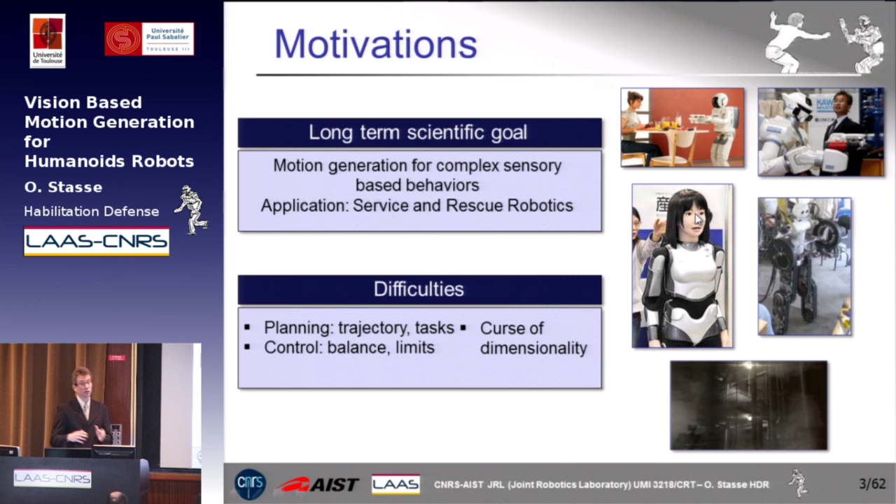And when we want to plan or generate motion, the main problem is to face the high dimensionality needed for this kind of robot. For instance, HRP2 or Asimo has 30 degrees of freedom to move and 30 degrees of freedom to manipulate, for instance in the new setup of Asimo regarding the hands.

So now, the question is what is the behavior? I'll give a brief introduction based on game theory, where we have two agents who actually play a game. We assume we have a game score that we will call F, that the agent we are interested in here is a robot, the HRP2 humanoid robot, and that this robot has a representation of the game, the environment of the game, and the other agent that we will call V, and that this agent can act in the environment, and the action will be here, for example, the position of the motors. Now, this game follows rules, which we will see precisely later on, and gives rise to inequalities.

And at the end, what we got is an optimization problem where we want to find a set of actions which will minimize or maximize the game score, considering the representation of the environment, and the free variable of this problem is the action. So based on that, the problem is how can we build the cost function for the behavior of interest?

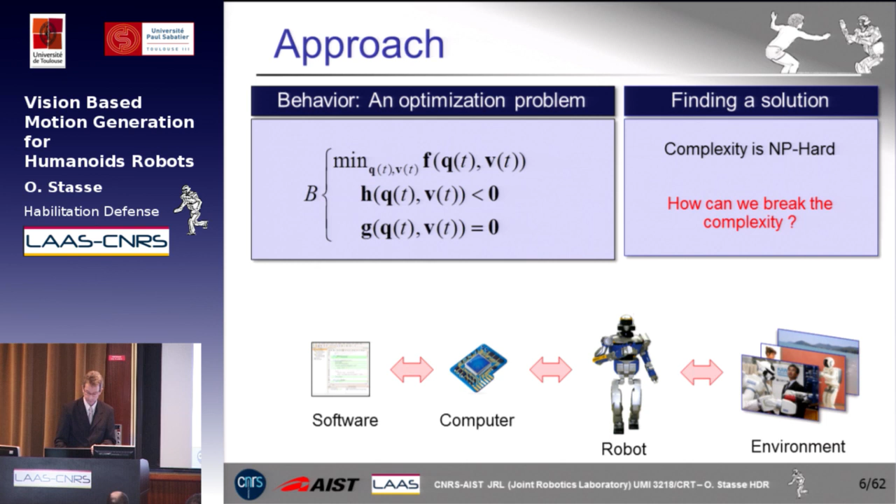So as a first remark, humans in their everyday life solve these kinds of very hard problems. So during my PhD, we tried to use this analogy of humans and basically tried to implement the human software, which is basically the connection of the neurons between each other, inside a classical computer, using new robots at this time, in 2000, humanoid robots, for their richness of motion.

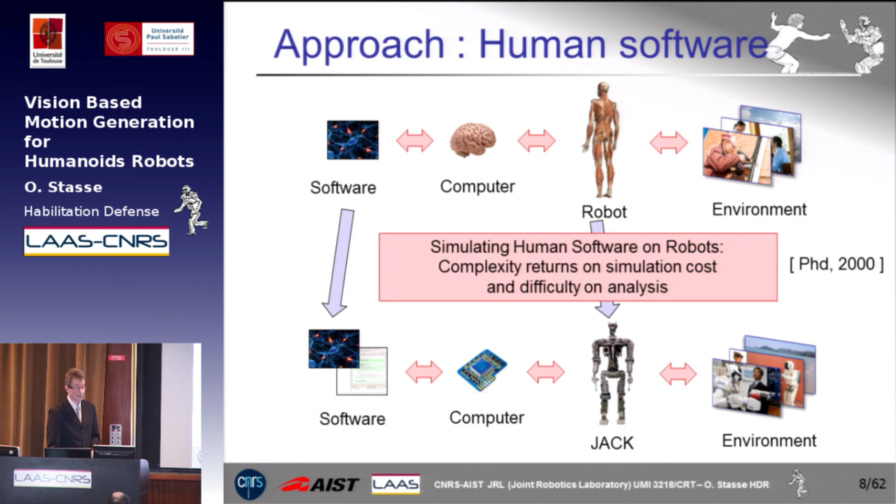The problem is that the complexity goes back into the simulation cost. Even if the software seems very powerful, simulation on classical software is extremely costly. Moreover, due to the underlying computational model, it's very difficult to analyze.

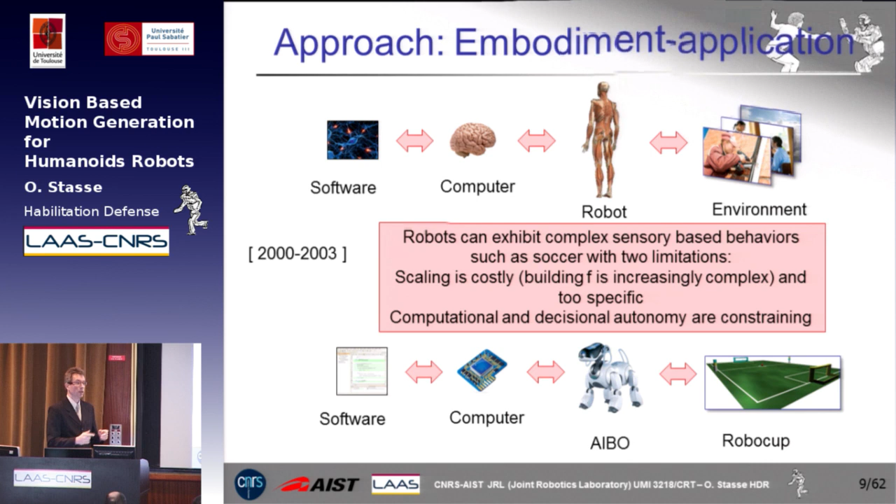During my assistant professor position, we worked on evaluating different kinds of software on a standard platform, the AIBO robot, in a specific application: playing soccer. The problem is that building a very complex behavior requires an extremely big hierarchical finite state machine, which tends to become increasingly complex and difficult to maintain. Moreover, because the AIBO robot had to be autonomous with very low CPU power, my main conclusion was that computation and decision autonomy in this specific setup were too constraining.

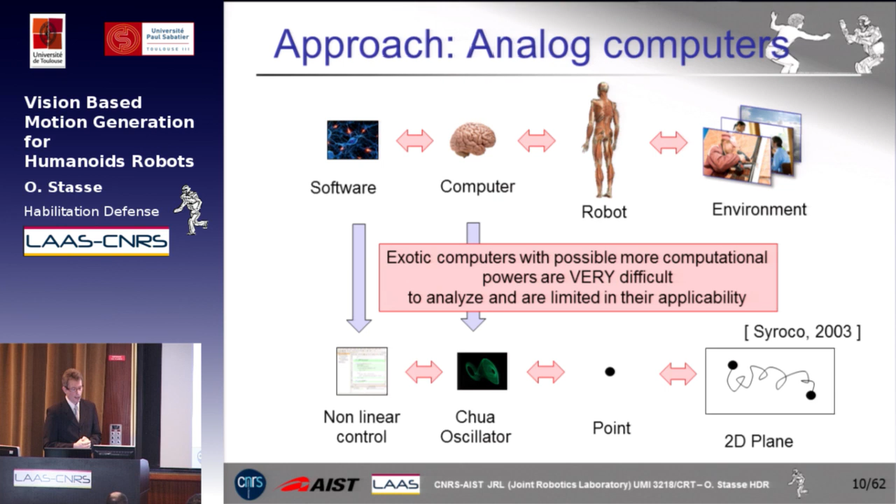A side work was actually to try a new model of computer. There are open questions in computational theory about whether some analog computers may be more powerful. So we tried using a Chua oscillator with nonlinear control as software to drive a point robot from one starting position to another. But the problem is that these are even more difficult to analyze, and currently their applicability is quite limited.

So when I arrived in JRL, I took a very different approach to solve this problem, which was to first find an efficient, practical formulation for our classical Turing machine and classical software system, with a given robot — here, the HRP2 humanoid robot.

We also tried to use general constraints on the robot to limit the search space, and instead of making custom solutions, we tried to build generic motion capabilities that are efficient and could be used in different contexts on the robot. For what I will present, we almost forget the human analogy.

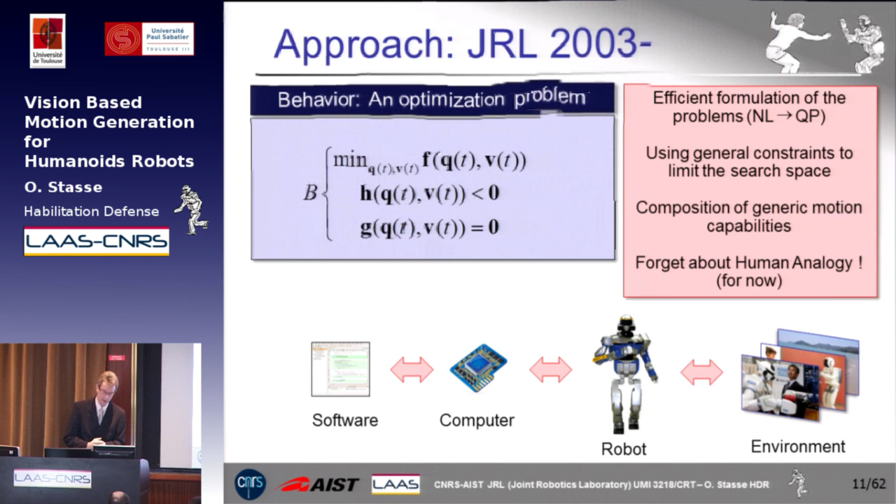To try to answer these questions, for the necessary meaningful constraints, we take into account the dynamics of the robot, physical limits such as self-collision, joint limits, torque limits, and — very important for humans and robots — balance. We also use other constraints like tasks, which give us basic functionalities that we can combine to generate motion.

Now, to deal with this huge search space, we use control and planning. For world representation, I've been working on self-localization and map building, object recognition, and tracking.

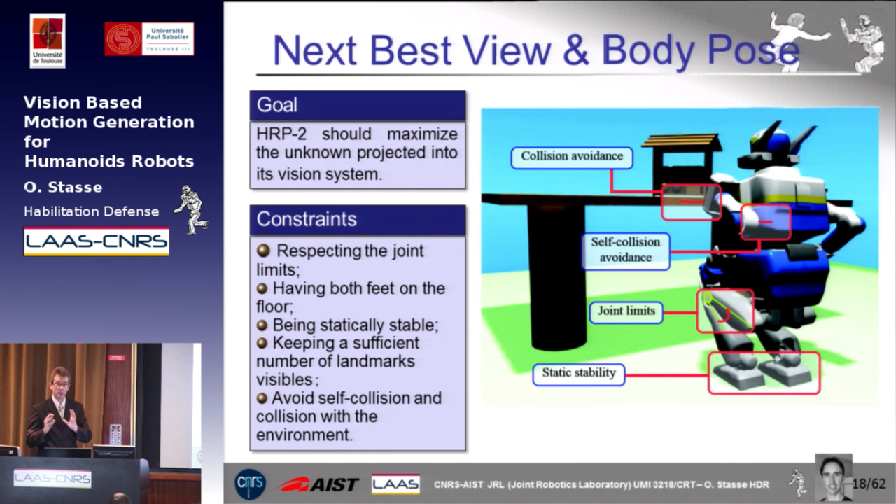For generating the pose of the robot, we build upon the work of Adrien Escande, who was a PhD student on this work, and Thorea Foissotte first tried to use this pose generator and try to maximize this cost. The problem is that this pose generator assumes you have a C1 function, extremely smooth.

But because we don't know what the robot has in front of him, we use a voxel map representation. We tried other things like Gaussian representation, but it induces, due to the discretization, local minima in the real function. And if you use algorithms such as FSQP, the algorithm will get stuck into local minima and will not converge toward the solution.

So what we proposed is to use an algorithm proposed by Powell, which will build a convex approximation of the function and propose a local minima in this space, giving a trust region and a start pose.

We apply this, due to some time constraints, to only the 6D pose of the camera, position and orientation. Then, for each local region, we find the best position, we try to generate a pose which will take into account all the constraints, making sure it's feasible, and iterate around on these two optimization problems until we find a fixed point which will be the solution.

It's going to be a local position, so on top of that, we do random search into the space where the robot is searching.

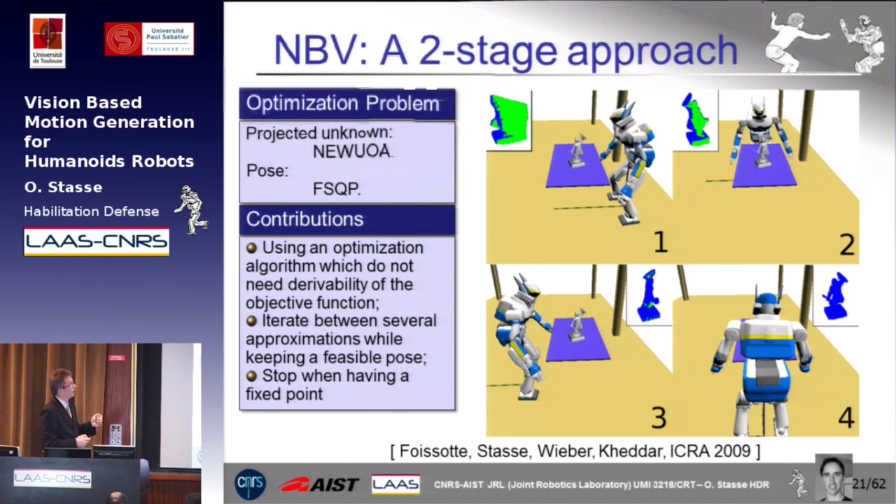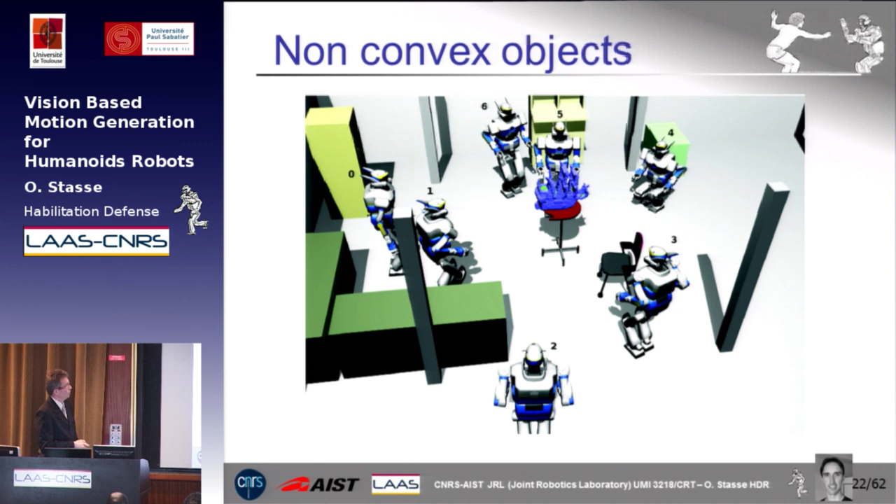Here, for example, a small battleship mock-up, and the robot finds 7 positions without collision with the environment, which seems to be physically reasonable.

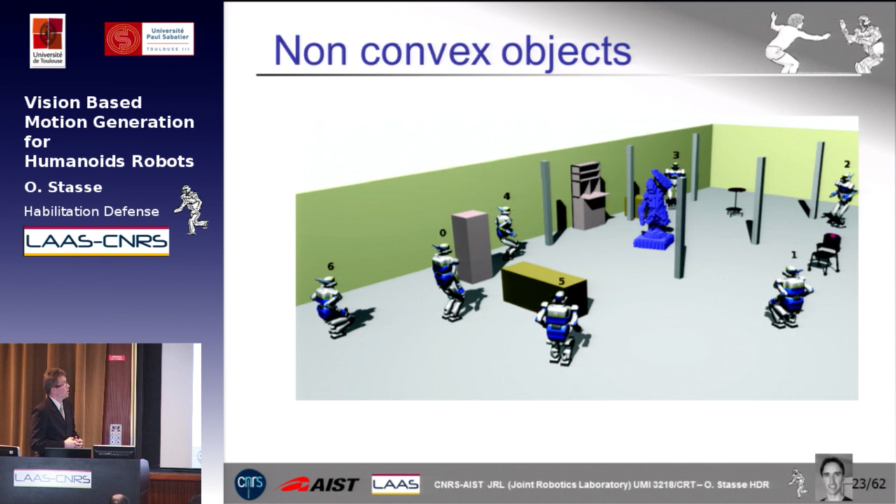You can even try to cope with bigger objects, and in the PhD of Thorea, we have shown that it can be used for buildings, for instance, or you can assume that you have a ship or a building that you want to explore, and that algorithm will work.

Now, the other high-level behavior we have worked on, this time with François Saidi, is visual search. This problem is, for example, trying to find your keys that you forgot in your house. But this problem is quite difficult, actually. It has been shown to be NP-complete by Tsotsos in 1996.

Which means that you need a heuristic strategy. You need to build again an approximation of the function you're trying to maximize. And because of the limited view, limited depth, and the fact that usually the robot, when trying to recognize an object, will depend upon the recognition and the lighting condition, we need active vision for this. So the rating function is quite complex and has a high dimensionality.

So we proposed a way to formalize constraints in order to restrict the search space of the system. And for this, we introduced what we called the visibility map. The visibility map assumes that the robot, for instance, will have a vision system which has a Gaussian,

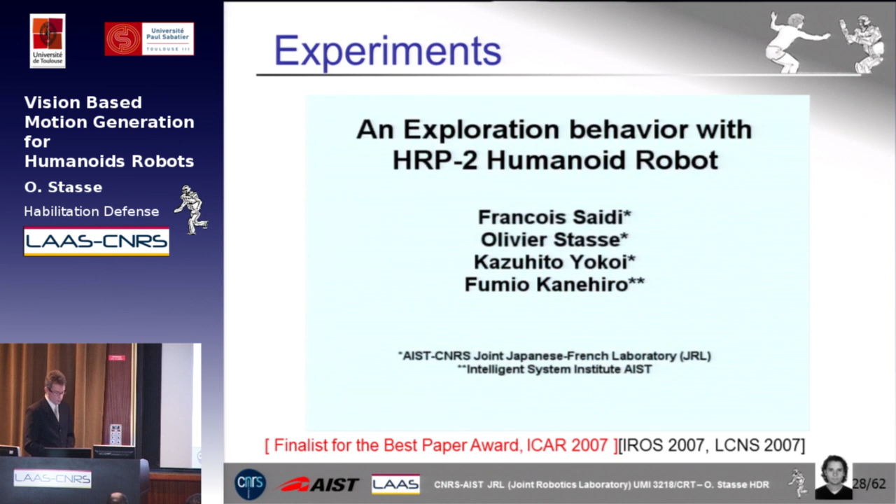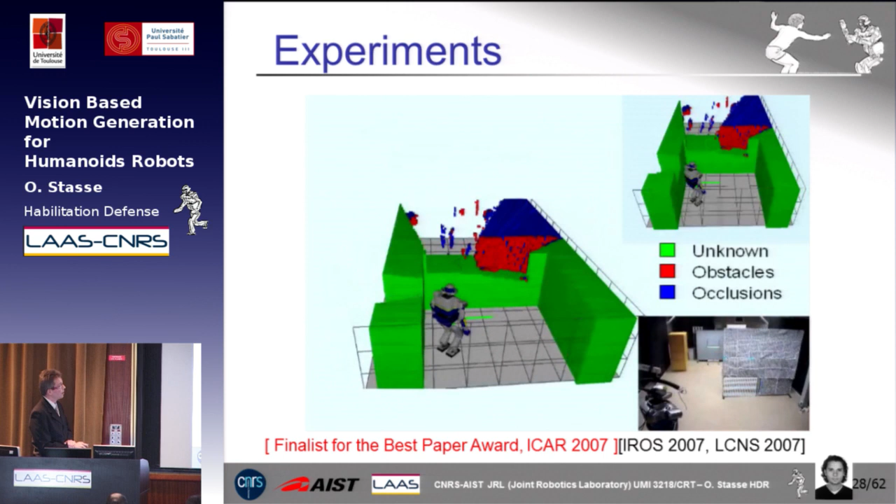So here you can see HRP2 exploring an environment. The green part is unknown, the red part is the one which is reconstructed, and the blue one is in occlusion.

What you can see here is that the robot will get stuck for some time into this square. The main reason is that to go over there, he has to go through this unknown part. He knows that he can step over some obstacle, but it's limited in time. So until he looks at this part, the robot will continue to explore his environment because he knows that he has to increase his knowledge about this local environment.

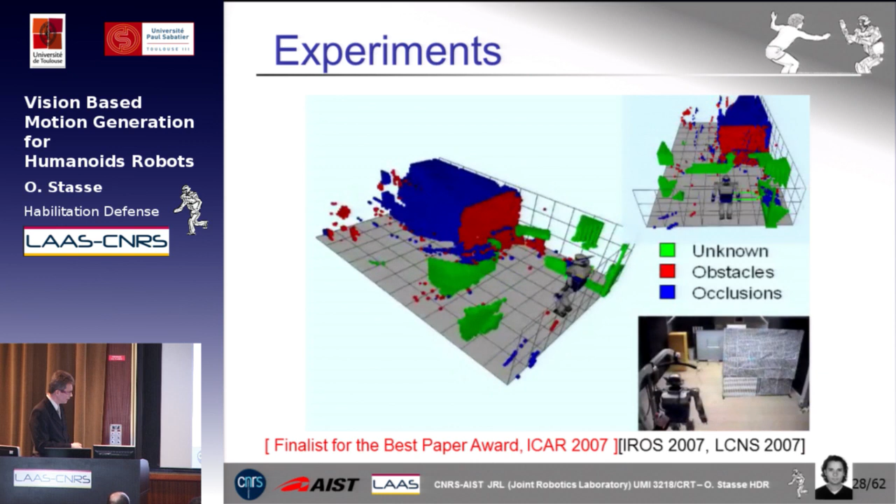So here you have a snapshot of the real experiment. In this specific topic, we didn't use localization, so we are always correcting the position of the robot because there is some drift. As you can see, it takes a lot of time. The overall behavior took 1 hour to be realized. And this work was a finalist for the Best Paper Award in ICAR in 2007.

So finally, you see that the robot is looking at the part who was forbidding him to go on the other side, and then he is now looking at the part which is occluded, until he finds the object.

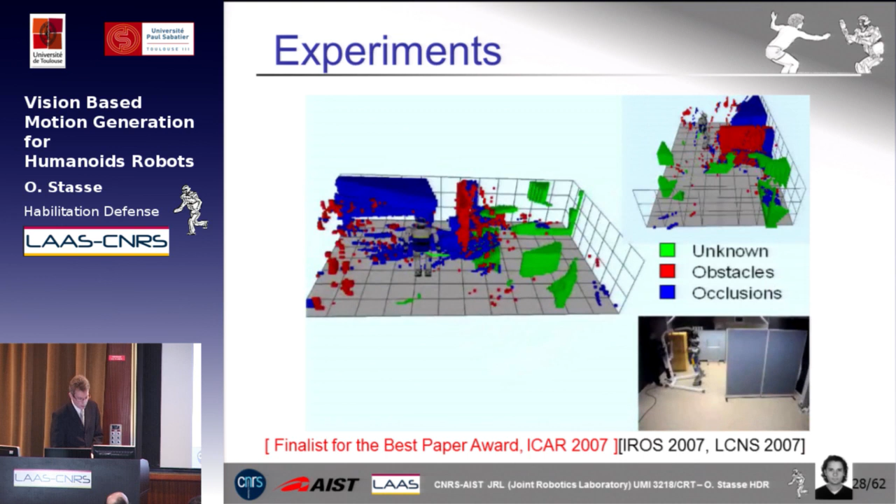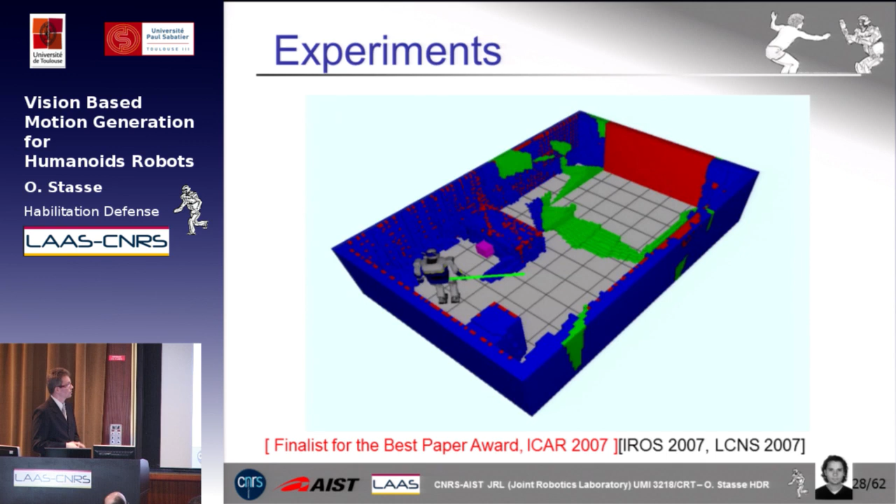So I will show quickly a simulation. Well, everything is perfect in simulation, so it's much faster. In 10 shots, you will see that the robot is able to find the object, the purple one. And because of the distance, we ask the robot to find the object 3 times before converging.

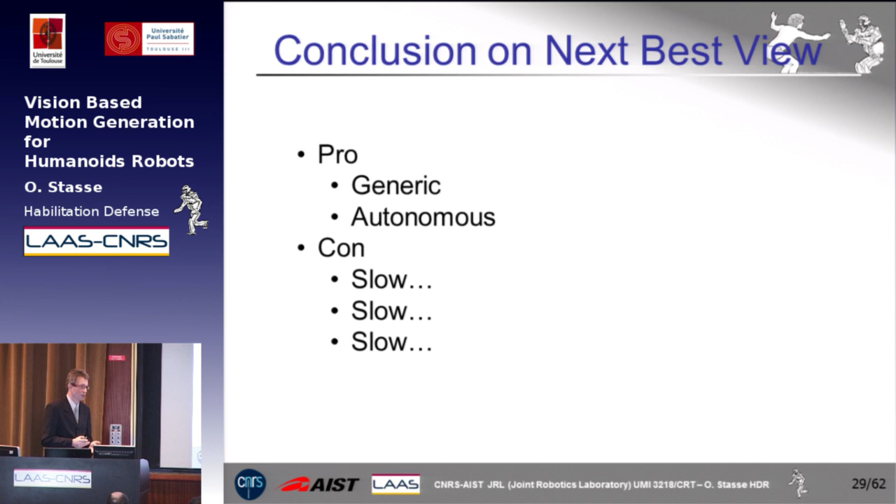So with this approach, we almost didn't take into account the motion generation part. So it's very generic, it's autonomous, but it's extremely slow. 1 hour for realizing the experiment is definitely not practical. So since then, I've been working on how we could use motion generation to speed up the realization of behavior.

So I will consider, in this part of the work, the problem of the motion constraint satisfaction problem. There is not all the constraints here, but I think they are quite important, which means robot dynamics, the friction cone, which here is a general way of saying balance, torque limits, joint limits, self-collision, and collision with the environment. We could add impact or other constraints, but this is the one I will focus most on in this part of the work.

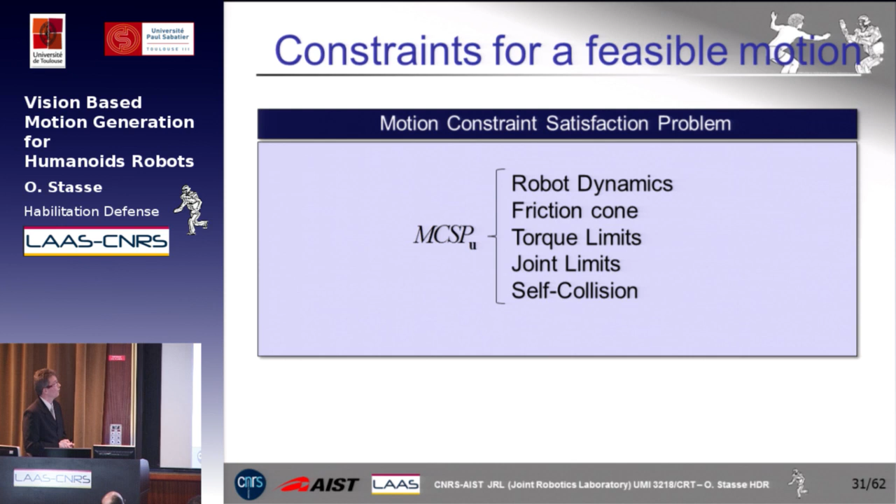So now, for walking, we will consider a very low-dimensional way of specifying constraints for balance.

As proposed by Pierre-Brice Wieber in 2003, we can reorganize the whole dynamical equation to have at the top of the equation the other part of the mechanical system, which here depends upon the acceleration of the center of mass, on which we project only the contact force through the Jacobian of the geometry of this contact point, and all the dynamics of all the bodies of the robot are projected into the derivative of the momentum.

When you assume that you have just one contact, this gives us what is called the RMP model, also known as the inverted free wheel pendulum model. The rest of this problem is: can we find a trajectory for the center of mass and for the derivative of the angular momentum in order to have the contact forces here inside the cone of friction, making sure that the robot is balanced?

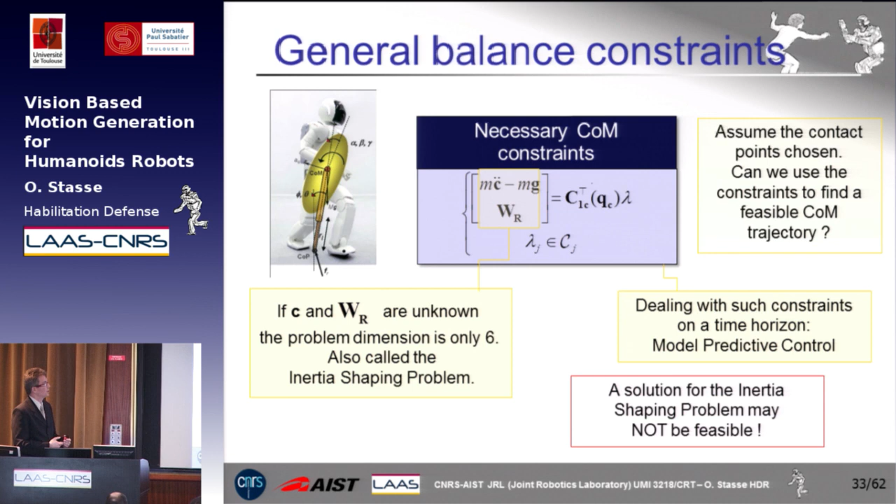So the classical way of dealing with robots who are on flat floor is to use a center of pressure, where basically we take the set of equations I presented previously, and we have this generic form, which is a second order differential equation, still quite complex to solve in real time.

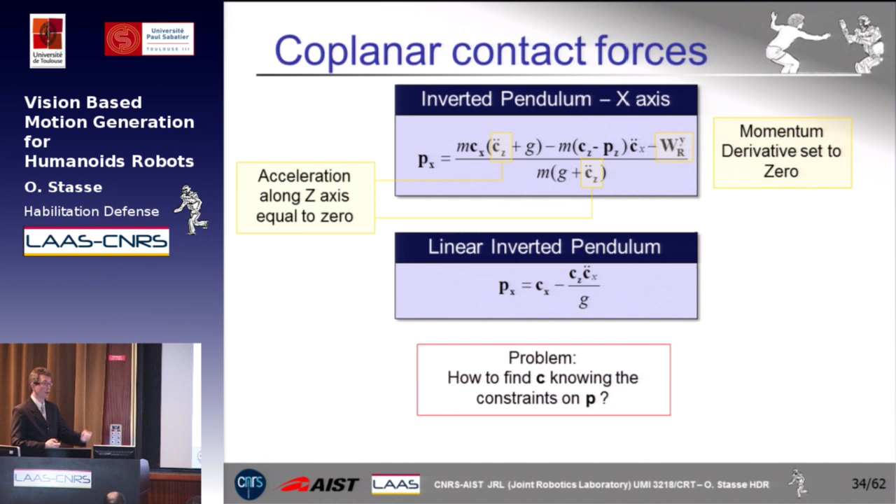So to solve this problem, what we generally do is assume that first the momentum derivative is equal to 0, and that the robot's center of mass trajectory is on the horizontal plane. And you finally come up with a classical linear inverted pendulum, proposed by Kajita in 1993. So the problem, once you have this very simple equation, is how can we find the center of mass trajectory given constraints on the center of pressure, which is a convex hull of the footsteps.

Kajita, in his very seminal paper in 2003, proposed to formulate this problem as an optimization problem, where basically you will minimize the difference between a reference trajectory, which will be the center of the footsteps, and the norm of the command. There is previous work on this, but this is the most well-known.

Now the problem with this system is that the center of pressure will have to follow this reference trajectory, and there is no guarantee that the solution will be inside the support polygon.

So then Pierre-Brice Wieber in 2006 proposed to constrain the center of pressure to be inside a polytope, and showed that we can expand this motion cost to other criteria, such as the one proposed previously. Now the interesting point is that with this formulation, your center of pressure becomes a degree of freedom. You can play on the center of pressure to minimize this cost function, which was not really the case in the previous formulation.

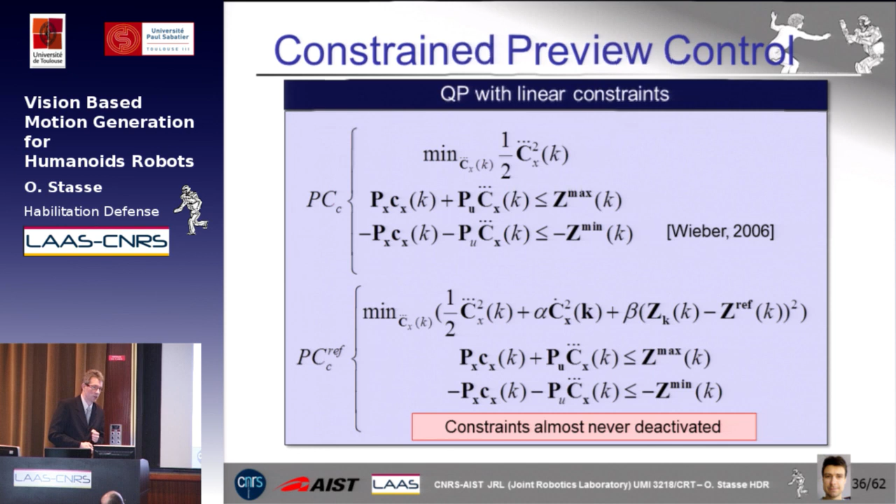Now, Pierre-Brice came to JRL to work with us for two years, and during this time, one of his postdocs worked on this formulation, used an off-the-shelf solver, and found out that when you try to solve this problem, once a constraint is activated, it's almost never deactivated. So we proposed to generate a specific solver in order to find a solution to this problem.

Using this particularity, we were able to decrease the computational time of a classical off-the-shelf solver, shown here, down to 40 milliseconds for a classical problem on HRP2. Then, using this new formulation, we were able to go down to 8 milliseconds.

But the control period for HRP2 is limited. So I did an implementation using warm start and limited time computation, which means that because we use a primal formulation of this problem, we always had a feasible solution during the iteration of the solver. What we did is just stop the iteration when we reach the 2 millisecond constraint. And what we found out is that the suboptimal solution is not distinguishable from the optimal solution, so we've got almost the same quality with this solver as with the previous one.

So in the frame of a national project I scientifically coordinated, we extended this approach and tried to find new cost functions. One of this seminal work was to introduce a reference velocity of the center of mass.

What's interesting then is your robot is not anymore just a humanoid robot. You can send it reference velocity like a mobile robot. But it has quite complex constraints, the classical ones I introduced previously. The key point here was to add footsteps as free variables. So now footsteps can be free, can be changed and found by this optimization problem.

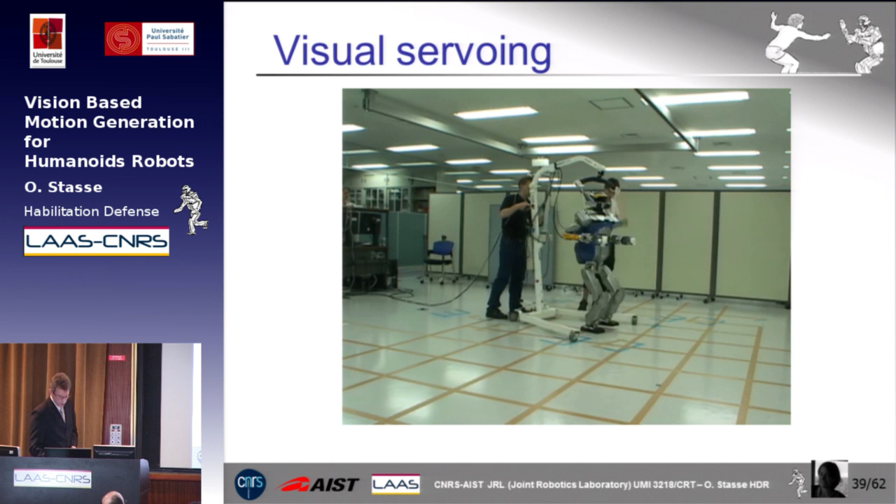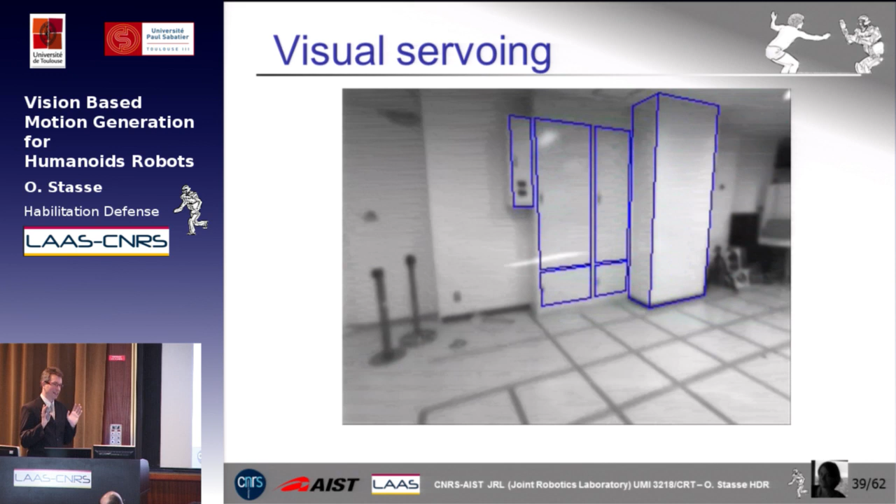For the tracking, we use ViSP. The reason the robot is kind of slow is mostly because of vision, and vision on a humanoid robot is hard, you can see the gap vision creates. ViSP is quite robust, but with all the perturbations we get from walking, the impacts, and their propagation through the mechanical structure, the precision of tracking was not so good. So we couldn't feed the reference velocity directly into the robot without filtering it quite a lot, which is why the robot is doing these very small steps.

From this, using the preview control, you have the center of mass trajectory. Using generalized inverse kinematics, you can get a whole trajectory for your robot. Using the classical recursive Newton-Euler algorithm, you can then compute the center of pressure for the whole dynamic, what we call multi-body center of pressure. You take the difference with the reference trajectory, and use a preview control on this difference of the center of pressure, and then have a difference of the center of mass trajectory.

This Newton-Raphson scheme happens to be extremely efficient. In only 2 iterations you can modify the center of mass trajectory and the center of pressure trajectory by taking into account the constraints of the body dynamic of the robot. So it's a very efficient way to compensate the perturbation of the upper body imposed motion and use the center of pressure as a degree of freedom.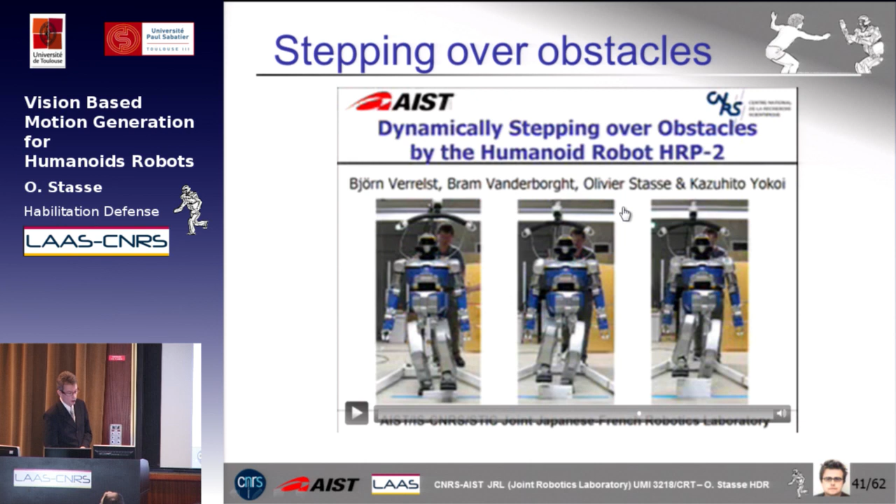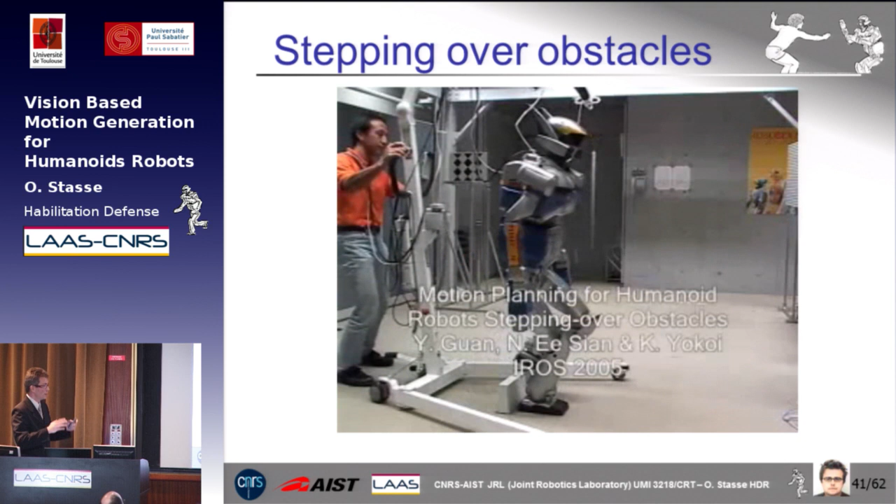So we used that with Björn Verrelst to do a breakthrough in stepping over obstacles with humanoid robots. The previous work here used a quasi-static criterion. The problem with quasi-static balance is that you constrain the position of the robot so much that it will always hit either the obstacle or self-collide.

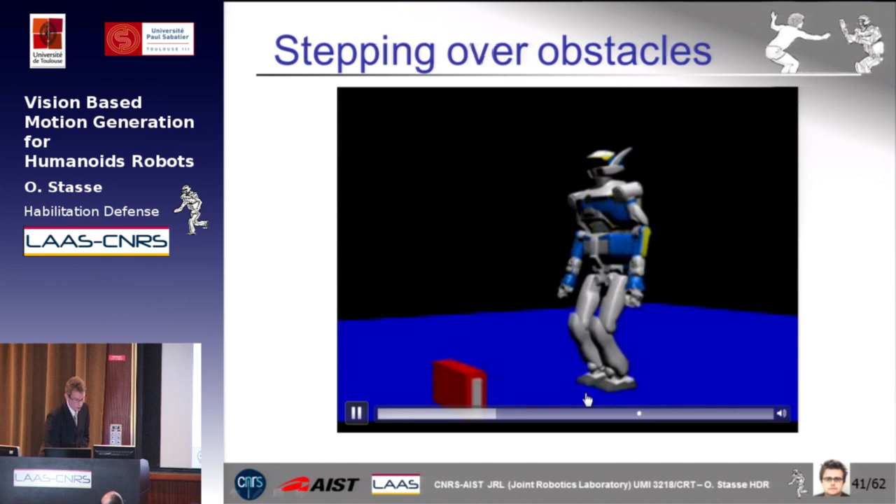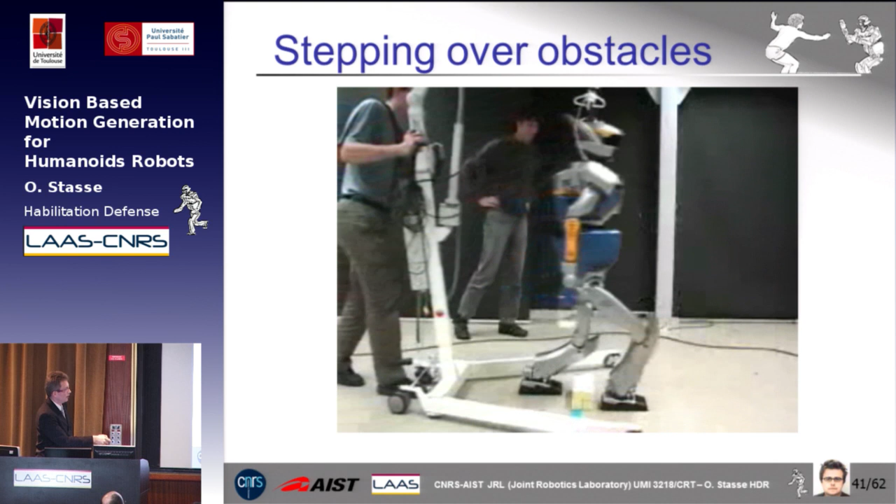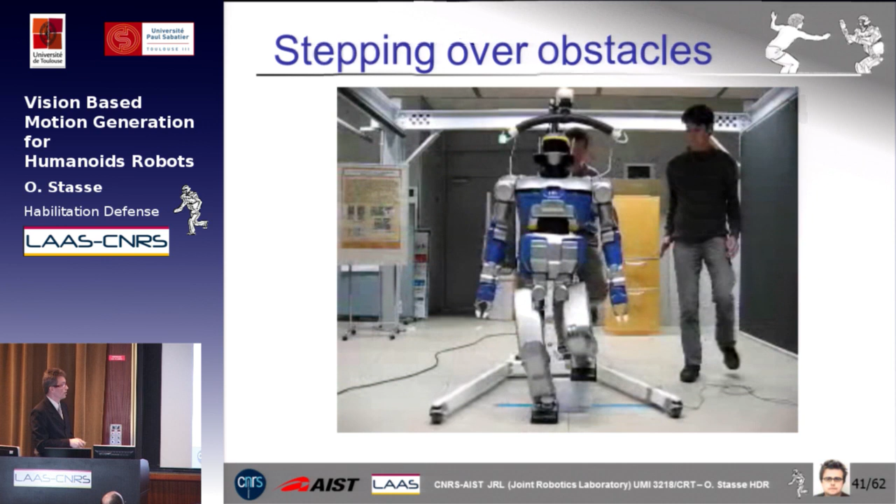So what we propose here is to use a dynamical trajectory. The heuristic is just to make sure that when you are in double support phase—for example, when the robot is over the obstacle—you don't have any kinematic constraint and you're not in collision. If this happens to be true, then you know you can generate the whole trajectory dynamically. So the only static position here is when the robot starts and ends.

So now let's move on to the problem of when we have the center of mass trajectory and the whole body motion. This is a long joint work with Nicolas Mansard on a framework called the stack of tasks, which combines simple controllers together.

For these simple controllers we make a few assumptions. We assume that we can compute a derivative. We impose that this error has an exponential decay. And most of the time, we define this function as the difference between the desired feature, as I've shown previously in the video with the structure which was followed, and the one which is currently measured.

What we worked on is a way to make sure that tasks could be automatically combined together in order to collaborate mutually if that was meaningful, or exclude them if it's not the case. And this is fully automatic. So when somebody has worked on a simple controller, this system allows us to put them together automatically. And the other interesting thing I like about this approach is that it's a kind of online optimization.

It's like you solve the problem while actually executing the motion. The problem with that is basically, if you go to a local minima, you fail. This is why planning is very important, to make sure that when you are in a basin of attraction, you are at a global minimum and your robot is not failing.

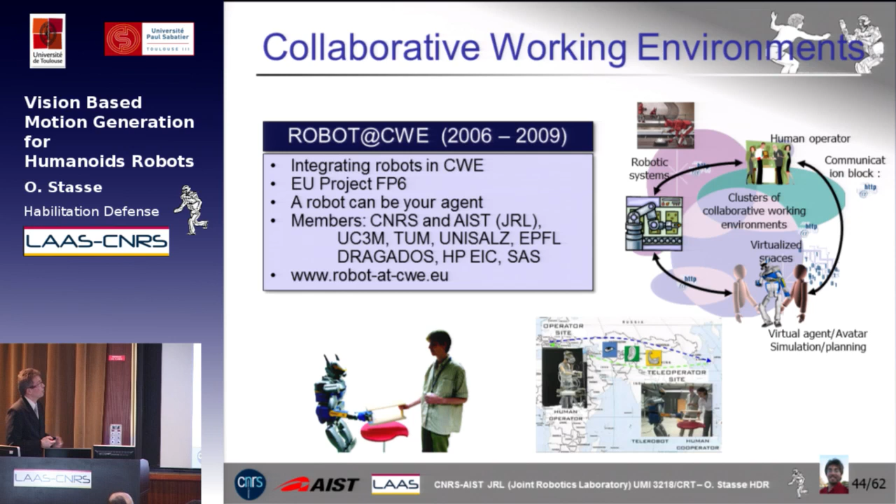This has been applied in the frame of a European project that our laboratory has coordinated, and Abderrahmane Kheddar is at the heart of this project, which intends to put humanoid robots inside a collaborative working environment where the robot has to collaborate directly with a user and through teleoperation. In the frame of this project, I was in charge of the final demonstrator.

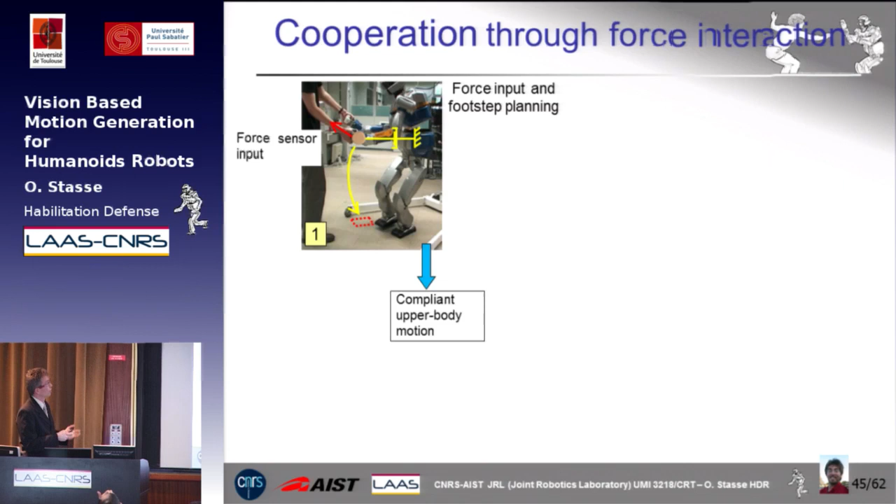The kind of basic controller we were using is, for example, here the robot has force sensors at the wrist. We designed an impedance controller so the user could gently move the robot. What we recorded is a standard position of the footsteps relative to the position of the wrist, so the robot was always trying to find the footsteps which would go back to this standard position.

Once we define these footsteps, we use our real-time walking pattern generator, combined with the stack of tasks, in order to generate a stable motion with a user handling a table here up to 5 kilograms. Thanks to this scheme, we are also able to take the input of a remote teleoperator directly at the gaze level and the upper body.

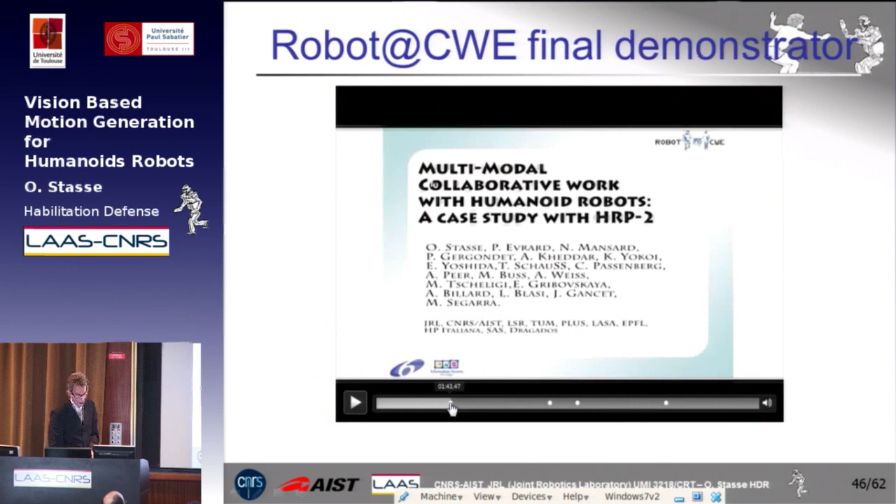So now I will show you some excerpts of the video of the final demonstrator.

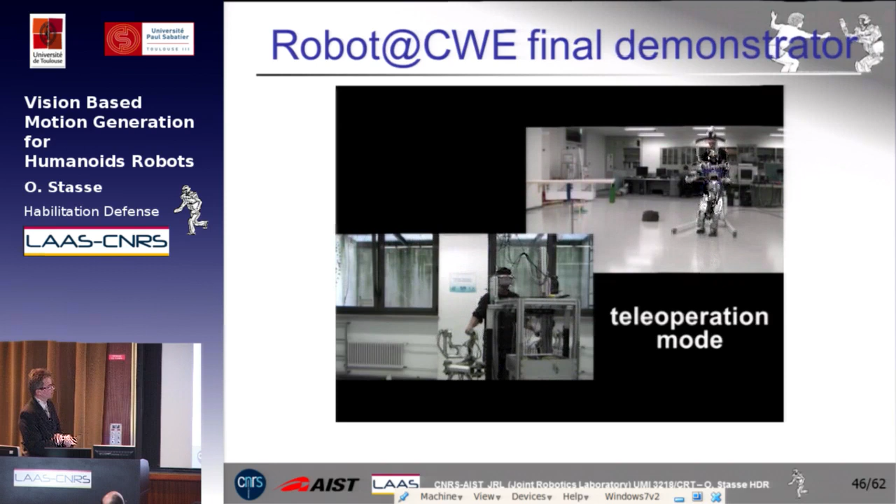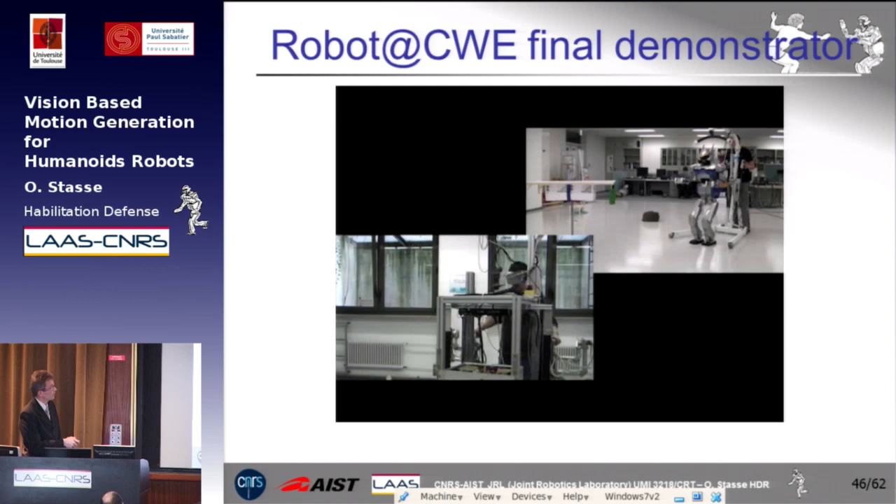You can see here our colleagues from TUM, the team of Martin Buss, who have a mobile platform on which 2 7-degree force control arms are mounted. The user is interacting with the end effector of these 2 arms. He has a head-mounted display, on top of which there is a motion capture system that gives the pose of this display, which allows us to control the head of the robot. What the user is doing by driving this end effector are the 2 hands of the robot, and everything is generated online and in real time.

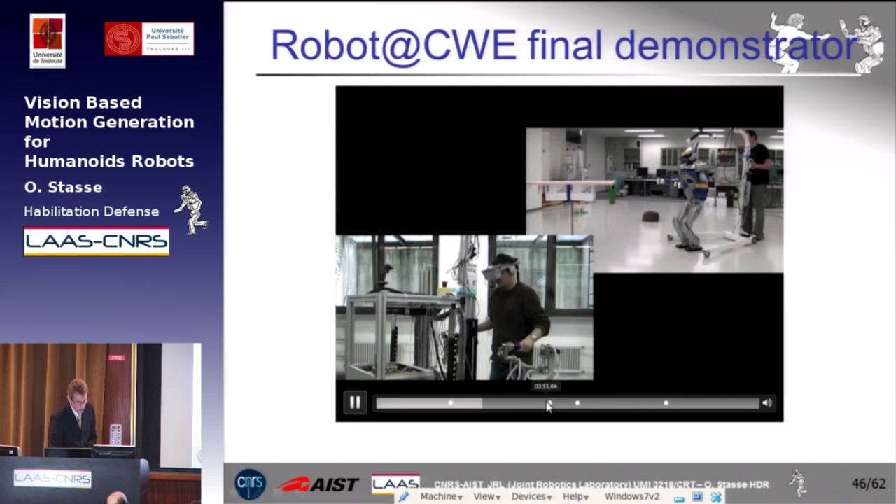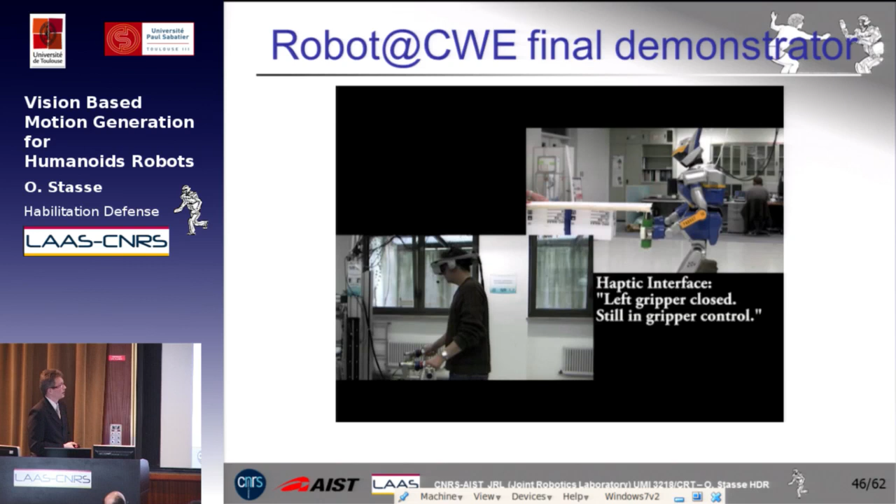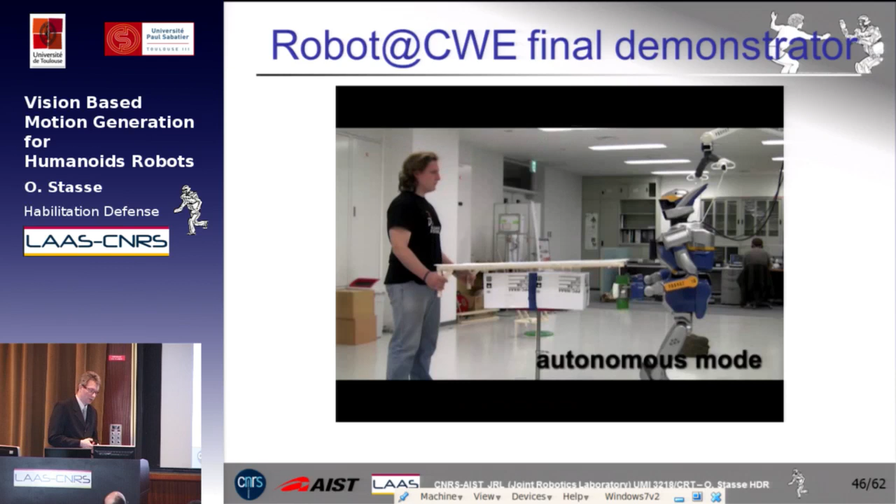Using the same scheme I showed, the teleoperator is now able to grasp the handles of the table. We switch between different tasks of the controller using speech recognition provided by TUM. Then, using a different instance of the stack of tasks, we can switch to an autonomous mode where the robot is lifting a table with a user and then starts to walk.

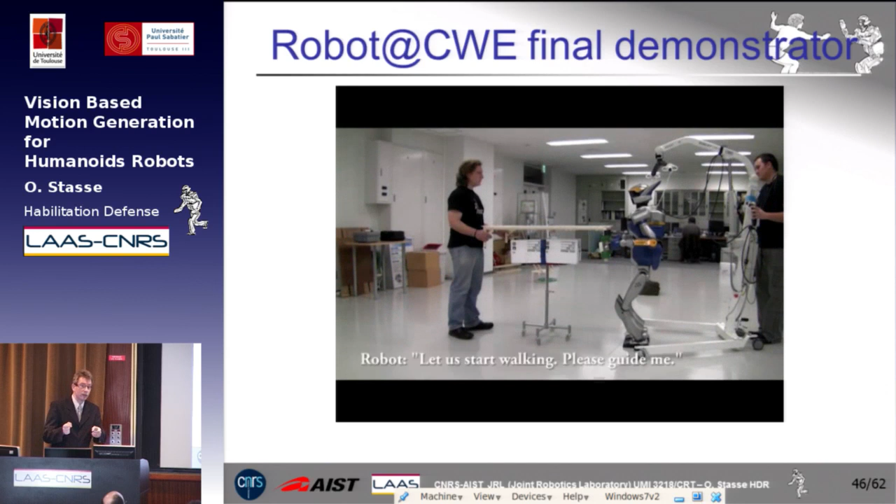So the person will try to drive gently again using the wrist sensor of the robot, HRP-2, in order to reach this final position.

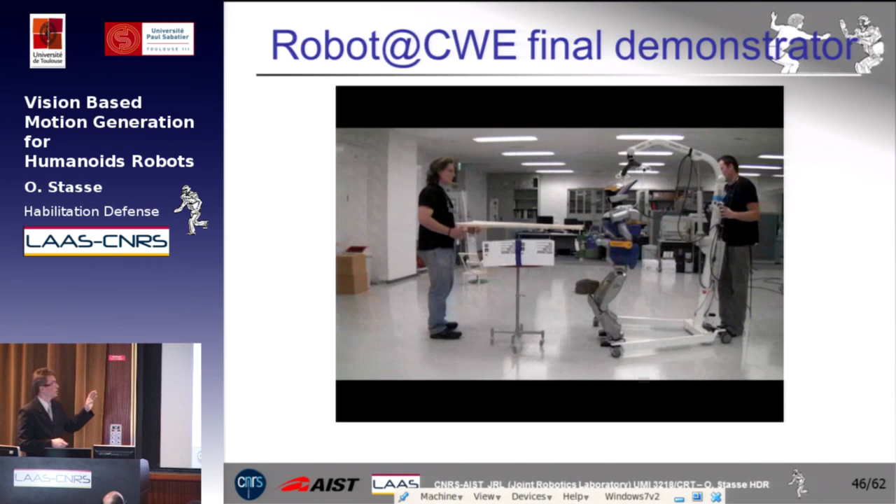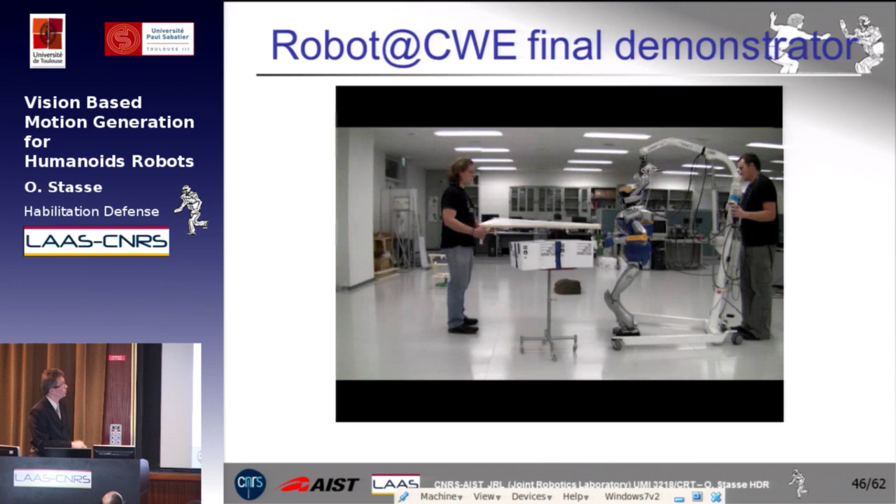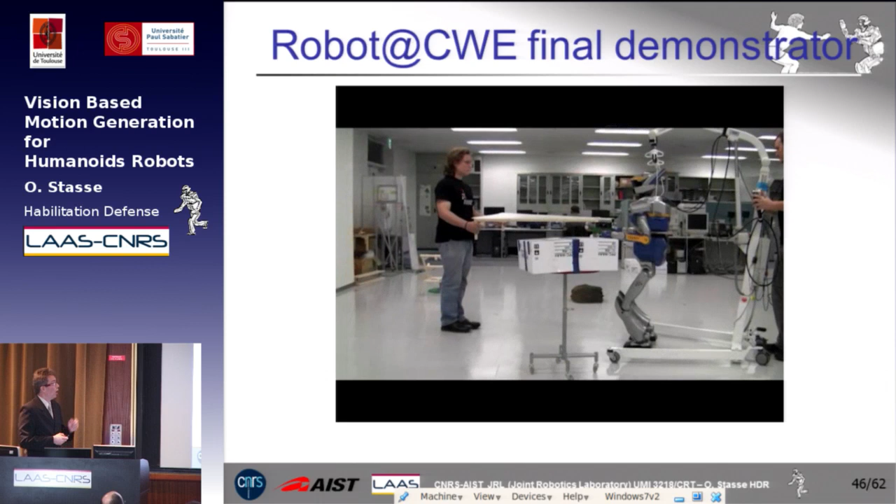The interesting part of this approach is that we tested it with colleagues from sociology, and we had 12 users who knew nothing about robotics, who never saw the robot, and they were able to guide the robot toward this kind of setup - not the final assembly task I will show, but just putting the table. With these 12 people, the average number of successful trials was 3, and I think about 3 were able to do it directly. So this means that this is really practical.

Also, it's quite slow. You can see the robot is going very slowly, and the main reason is the robot knows nothing about the future. It makes no assumptions, so it is very conservative. It assumes it will always take a step, and then suddenly somebody moves the hand, and it has to adjust by 10 centimeters. The robot can go much, much faster than that.

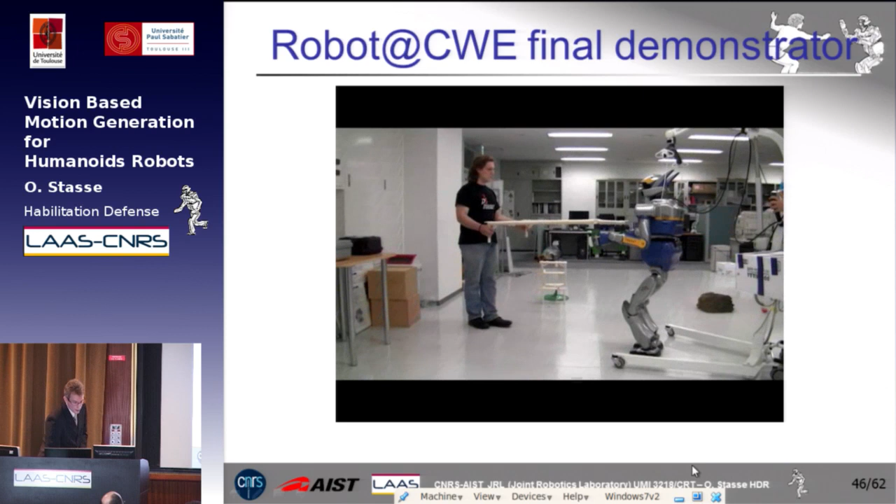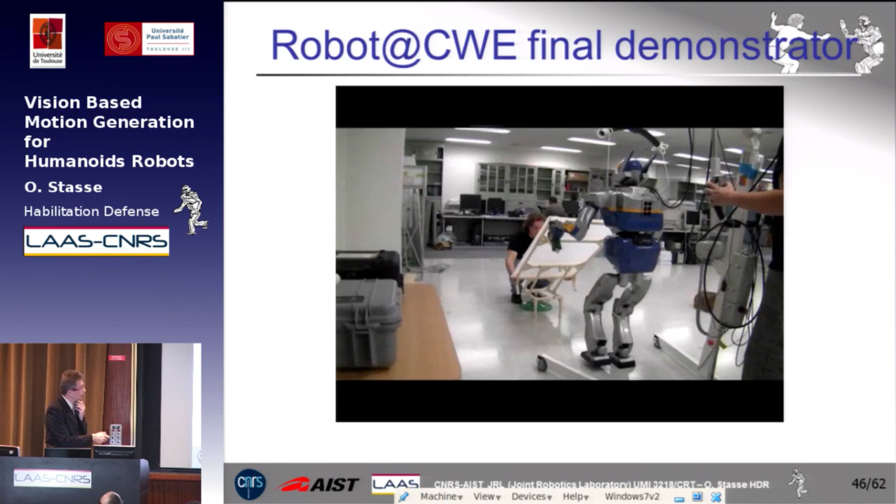And again, the final assembly task. Just by simply playing on some of the gains here in admittance control, in some specific direction - here the rotation - the robot is gently following the person in a very complex setup. So, thanks to the stack of tasks, we're able to combine these simple controllers and integrate priority with mutual exclusion using projection into null space.

We're able to take into account constraints with some recent extensions that Nicolas has been working on, also at the dynamical level. Now the problem is that we still have issues when the function we're trying to minimize has some rank deficiency. We can have speed discontinuities, and we can get stuck in local minima, which I think is maybe one of the biggest problems. And when we switch between tasks, we may have discontinuities.

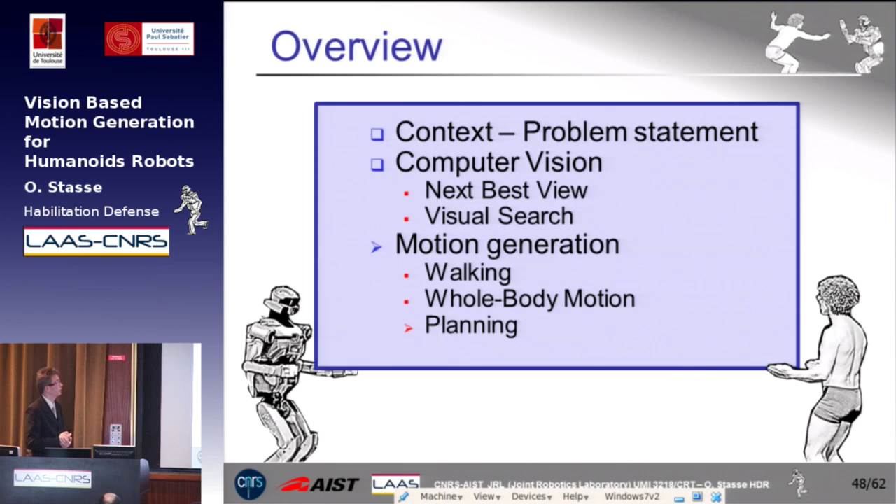This is why I worked afterward on the planning of this task, and for this we tried to investigate the problem of footstep planning. When we started this work with Nicolas Perrin, the state-of-the-art method assumed you know a discrete set of footsteps for which you have the whole trajectory, and you know all the constraints I was talking about are fulfilled. Then you optimally plan in this subdimensional set of actions to find a footstep. This is very efficient, however, when you are in a very constrained environment, you would like to use other motion capabilities of the robot. Our goal has been to try to identify and learn this footstep space.

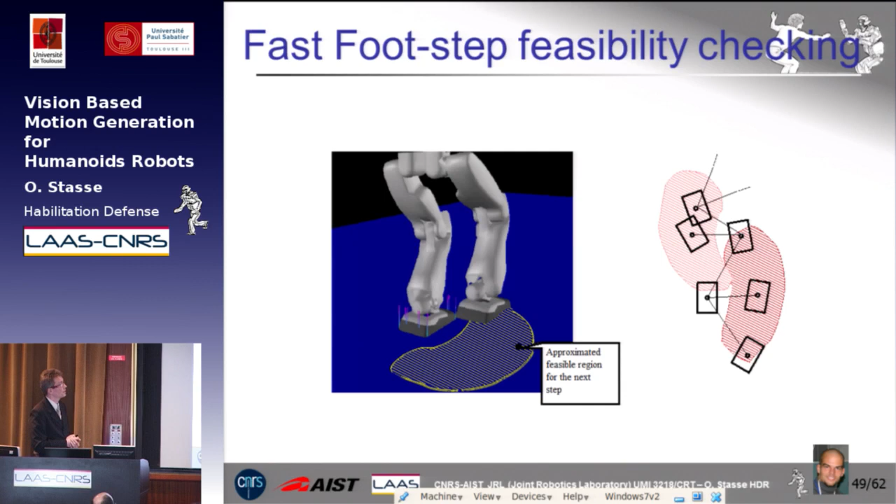What we have done is assume a transition from one footstep to another, which is a six-dimensional input space. Using all the mechanics I showed previously, we generate the whole motion over a limited time. We compute the distance to the constraints, and taking the minimum of this distance, we get a scalar value. We then learn the relationship between this input space and this output space. It took 11 days to do that with a lower dimensional version of this work. But the interesting point is that once it is learned, to find out this value given an input, it takes only 9 microseconds.

So you can have a very aggressive planning strategy in order to plan all the controllers I was talking about. If you want to do that in real time, you are limited to 4 or 5 possibilities. With the approximation map, we were able to identify this shape, and what we did is fix points inside the polytope, and find the constraints on the footstep position I was talking about.

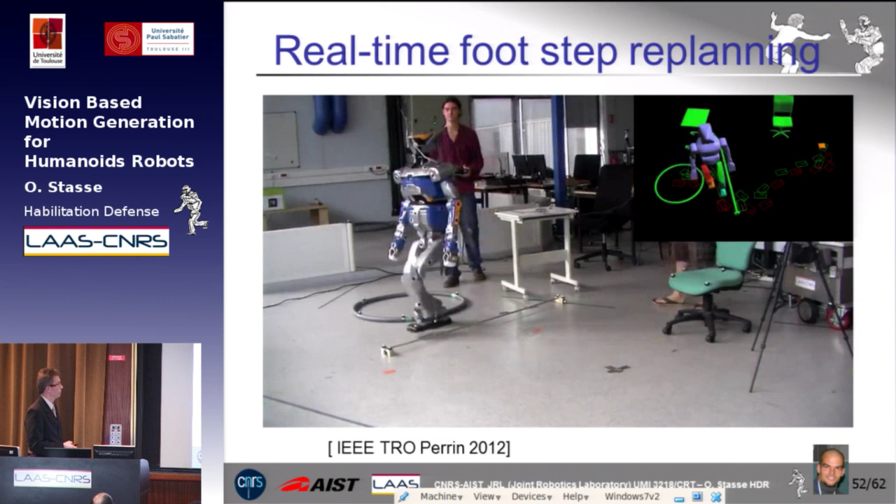And on the real robot, here we can use them to step over some obstacle. Here we use motion capture because, unfortunately, we were not able to use the refinement of our planning system with vision, but we hope to cope with that presently.

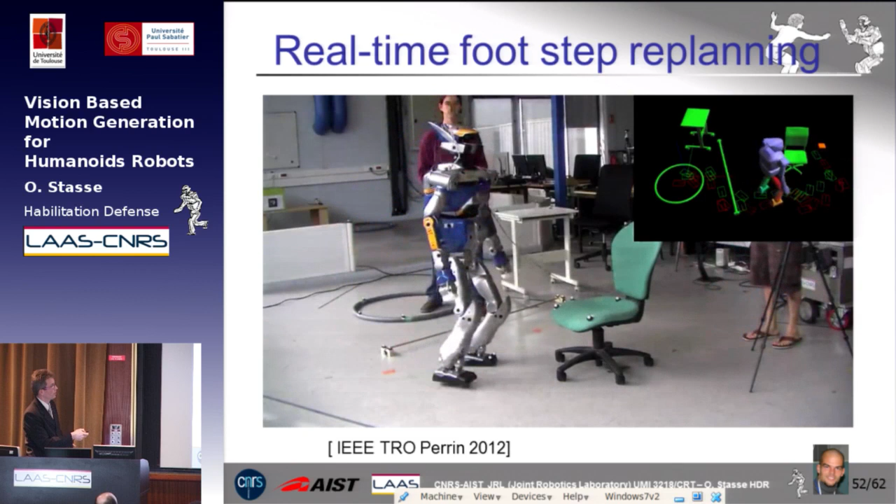What you can see here is that we move the chair and the system is permanently replanning and finding a new solution, even if we change the goal.

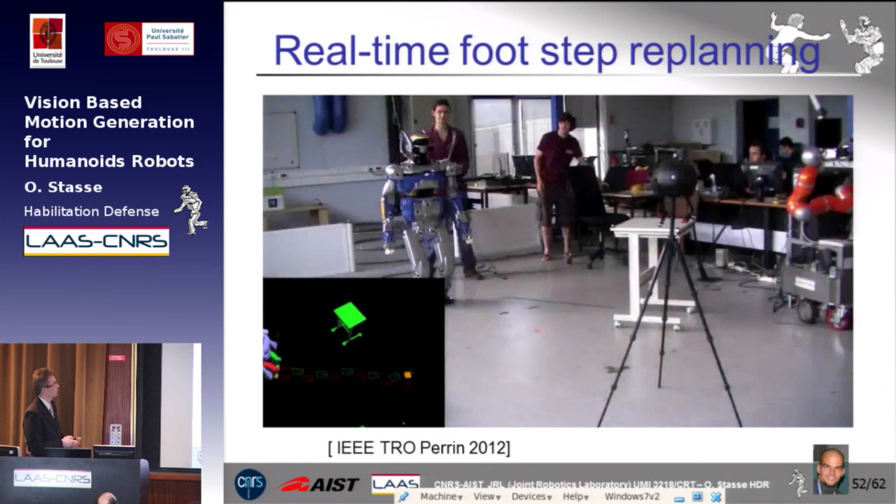So here you have a very simple setup where basically you have the goal on top of the helmet. Somebody put a chair in front of the robot, whereas he's very close to the goal, but then he can find very quickly a new solution to replan.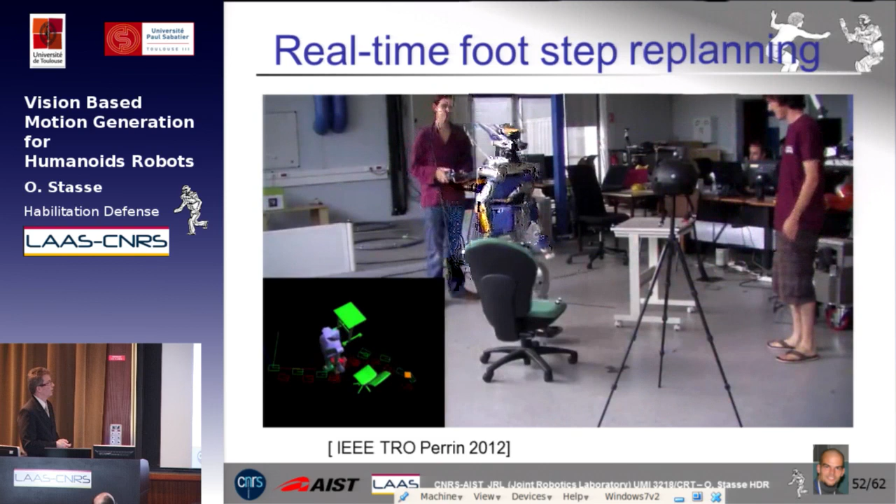So of course it's not perfect, so you can see that the robot is slightly here colliding with the table. But it works. The problem here is that it doesn't have the model of the tripod inside the environment, so we have to remove it.

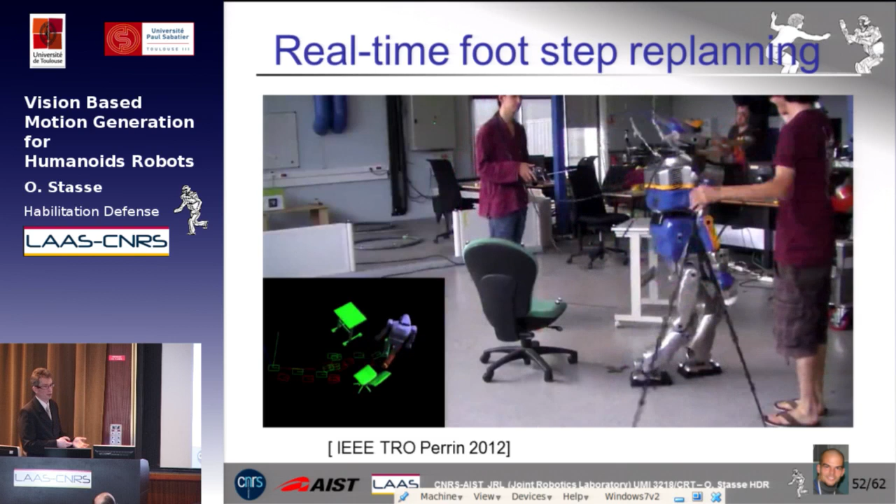The conclusion of this work on motion generation is the following: it's possible at the control level to combine these basic controllers using the framework called the stack of tasks, but it has to be used with a planning framework in order to avoid local minima, which calls, however, for a very powerful steering method, such as the approximation function I showed.

But we would like to go further. Indeed, I'm convinced that HRP2 has not been fully exploited. Abderrahmane Kheddar and other people in the world have shown that it's possible to do multi-contact motion with this kind of robot. Now the question is, can we do it in real time, trying to minimize the kind of cost function I showed? Can we also do motion generation using heavy objects? We will change the dynamical property of the system, and can we go towards extreme motion?

So now in this context, I will briefly explain my research project, which actually comes from a big frustration of the final demonstrator I showed you. The robot was stepping, okay, because he has no knowledge of the task and what the user wanted to do.

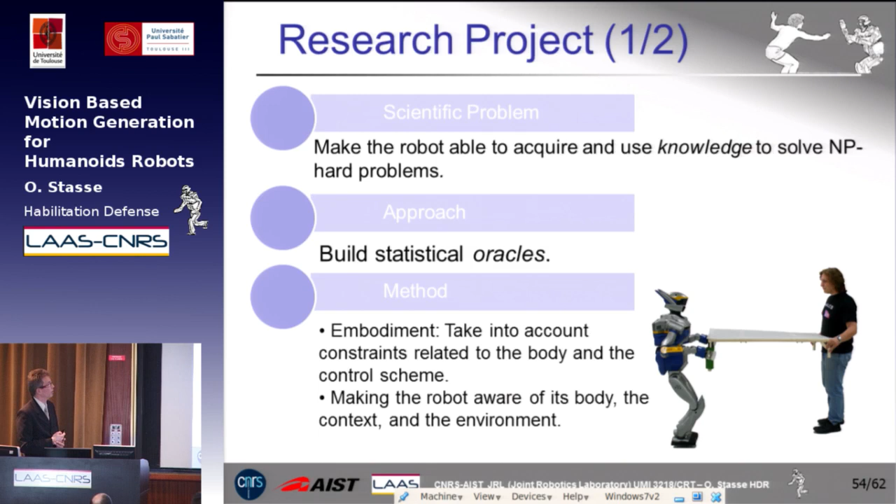So what we would like to have is a model or a way to acquire knowledge on the context and the environment to build what I call statistical oracles. And I think that for this we need awareness—make the humanoid robots aware of its body, the context, and the environment.

So, if we go back to this simple example, what we would like to have is to learn the transition of this local minimum based on this new information provided by the representation of the world, and use learning techniques to guess that the most probable next local minimum will be this one.

Whereas to help the learning of the system, we want to have more powerful controllers and learn their domain of validity in order to speed up and cope with the dimensionality problem related to the learning of this kind of transition. So one of the works on this advanced controller, a very recent one submitted to IROS 2013, is to go forward and integrate vision directly inside walking.

So here we're not trying to minimize a reference velocity, but we use a preview control on the desired visual feature, and we can integrate it directly at this level.

So the other one is to actually get some feasible sequence of tasks to generate a complex motion.

And the one we are trying to address with Nicolas Mansard, while supervising the PhD of Sovanna Hak, is to record humans and extract from their motion a set of controllers related to the humanoid robot. So it's not only a mapping problem between a human body and the body of the robot, but also the set of controllers that he's using.

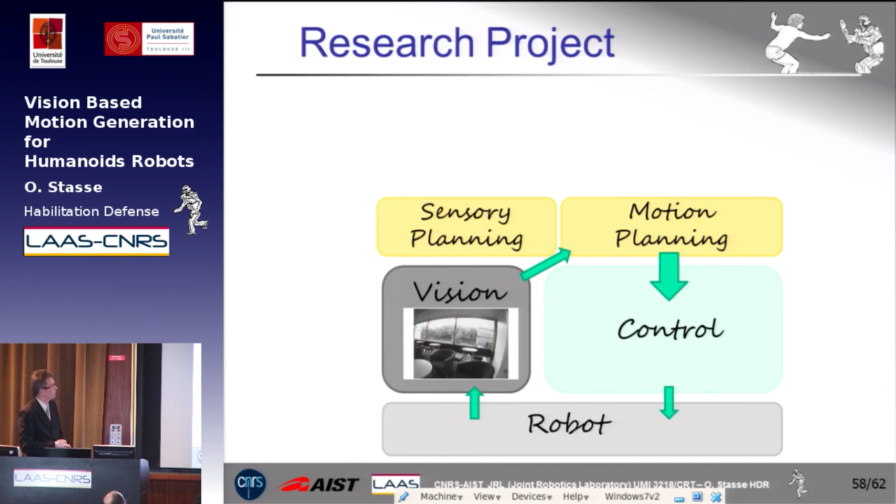So the extension of the classical sensory motion loop, where we usually take vision and plans of where we want to see next, the motion, and then feed it back to the control, is the following: we want to create intermediate statistical structure, such as the one proposed by Davison in 2009, which gives us a higher representation of the world.

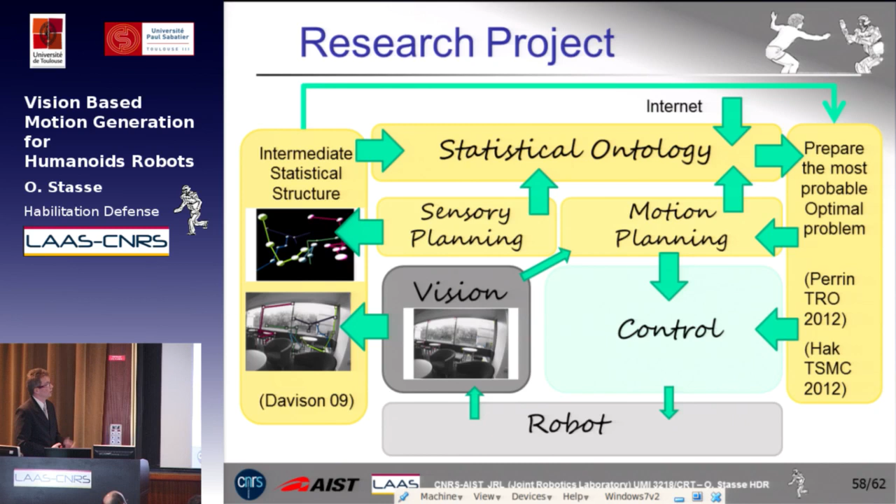Use a statistical ontology, which could use information from the internet. Then, the first time we see a problem, use a classical motion planning approach, relate that with the control part to create a bootstrap between the intermediate statistical structure and the local optimization problem we want to face. So when the robot faces a similar environment or situation it has seen previously, instead of using the classical approach, it can refine the same solution and go directly to the most probable local optimization problem.

So the kind of challenge we would like to tackle with this approach is the Future Factory. Here you have the vision of Ford's Future Factory, which I think is shared with a lot of people in Europe and abroad: to use the knowledge we have of this very structured environment, the fact that we can add additional sensors to this kind of setup, and our interaction with industrial partners.

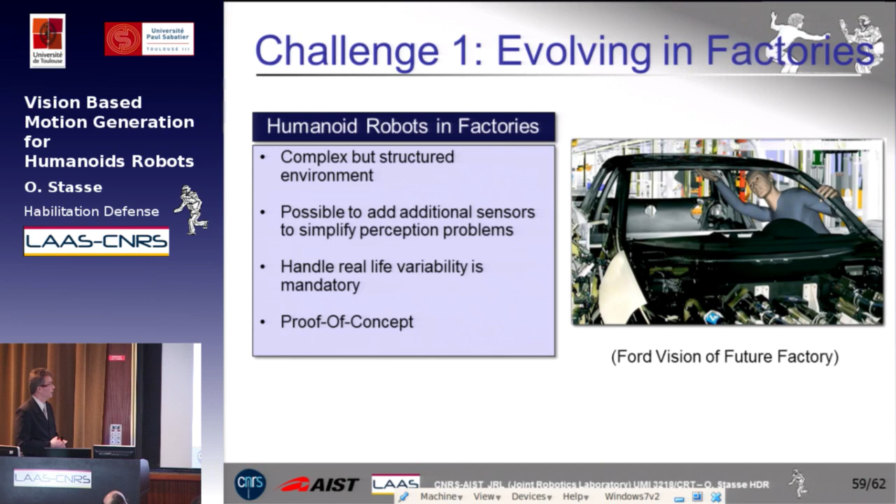One of the biggest needs industrial partners had was to handle real-life variability, which I think makes very pertinent all the work I've presented previously. In this frame, with a big industrial company in Toulouse, we are working toward building a proof of concept using this setup.

The other challenge, I think extremely interesting and strongly pushed by Jean-Paul Laumond, is to go towards extreme motion, such as parkour, where, for example, we would like the robot to jump. Actually, one day in Japan we made an HRP2 jump.

It was not what we intended, but the robot was able to cope with it. So we know there is some area where we could use this kind of robot, but it's very likely that we're going to break it. One way of dealing with the complexity is to modify the mechanics to locally handle some very complex motion.

For example, variable impedance, where IIT in Italy is a leading institute in this direction. But from the control viewpoint, the problem is that your system becomes highly nonlinear and you double the number of unknown variables. So again, we need some way to speed up the resolution of the optimization problem related to the use of variable impedance robots.

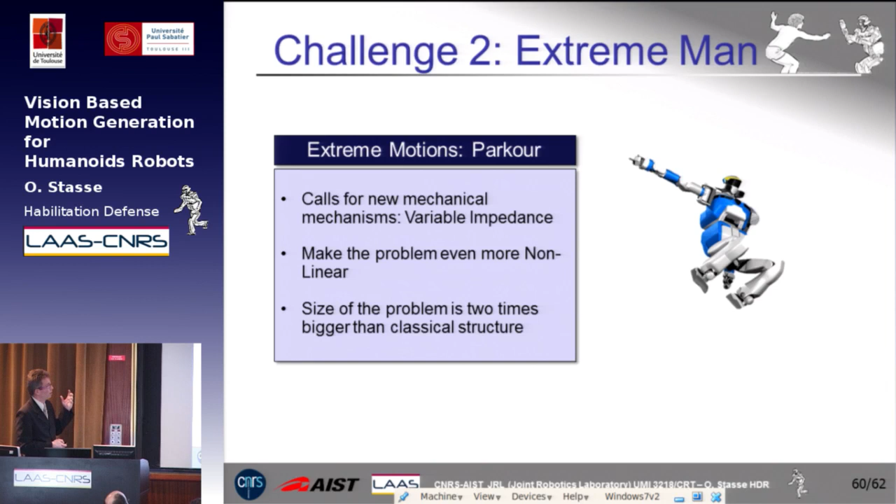For this, with colleagues from the UK, University of Birmingham, University of Bristol, and IIT, we submitted an FP7 project called Triple E, which I coordinate, trying to achieve the triple awareness I was talking about, where we want the robot to be aware of its control and physical limits, aware of the context, and aware of the purpose, in order to strongly decrease the search space of the motion generation problem.

We would like to apply this with a big industrial partner. As I mentioned previously, we are working on a proof of concept for that. We are also participating in a challenging project which aims at putting the HRP2 robot outside, sponsored by an international oil company. And finally, in this kind of frame, we are involved in a proposal to bring robotics challenges to the robotic community.

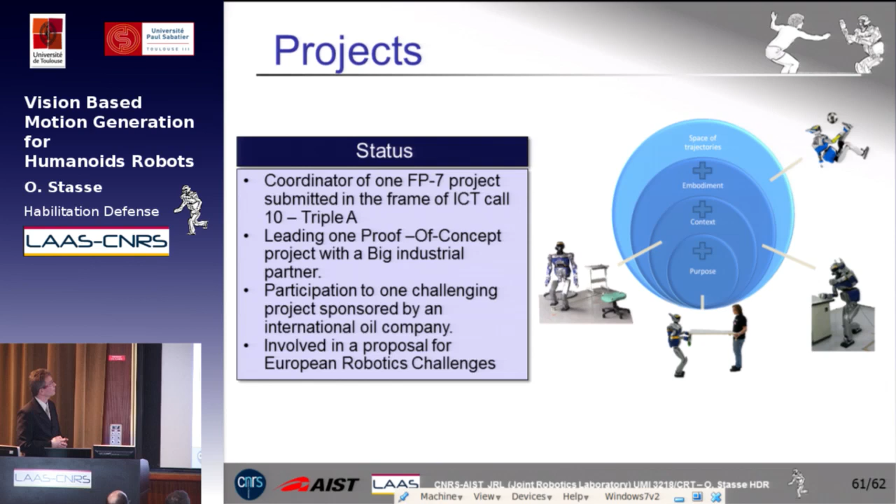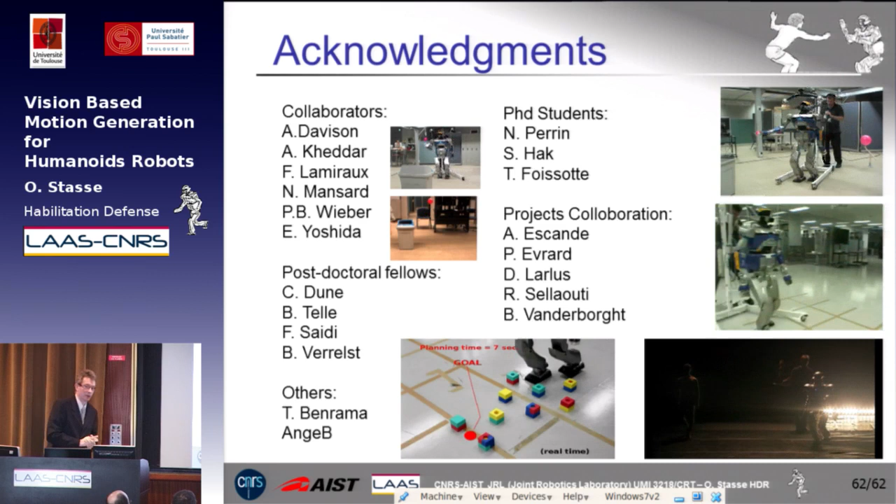Finally, I would like to acknowledge all the students and collaborators who helped me realize this work: Andrew Davison, for SLAM, Abderrahmane Kheddar, who made a very nice environment at JRL, Florent Lamiraux, Nicolas Mansard, and Pierre-Brice Wieber, who are the people with whom I'm working the most and continuously developing the ideas presented here.

Eiichi Yoshida, with whom I've been working quite a lot, and of course the PhD students who did tremendous work to make this happen, along with all the collaborations I've been able to perform with postdoctoral fellows and project partners.

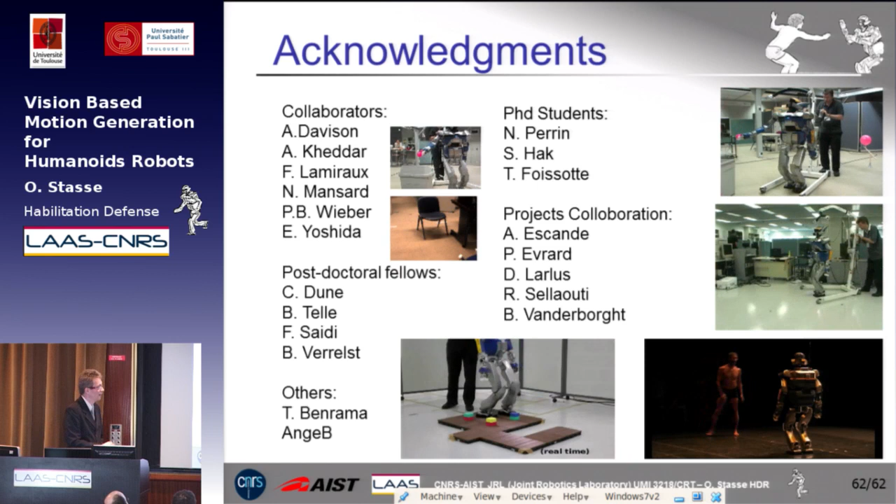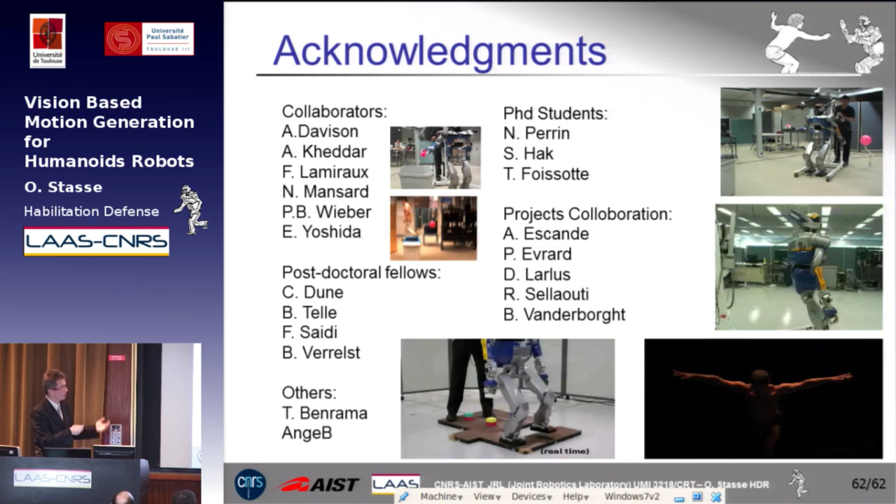Finally, I have a soft spot for a project we did in Toulouse as part of a national project I was handling. One day we had a proposal to make an artistic performance with a hip-hop dancer, and we were funded by the Mairie of Toulouse to put on a show with this dancer. He came here, and we used a lot of the techniques we were developing with Nicolas to generate the motion.